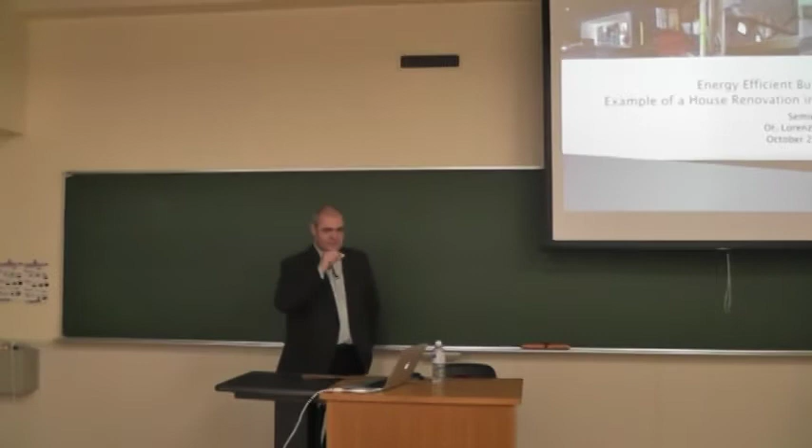Thank you very much, and thank you also Eckhard for the introduction. So, of course, I'm not a specialist, I'm not an architect, but as I mentioned, we had this experience personally in renovating a Japanese house. This will be the second part of the presentation. But I would also like to start with an introduction about energy efficiency and also current research and development trends.

Concerning my vita, in Germany I worked for ABB, a Swiss-Swedish electrics group, and this company also makes house control systems. So already then I had to deal with this topic. At the German National IT Research Center we had a research group working on room or appliance control via internet protocol. That was in 1996, and I introduced it to the industry, and people were quite shocked, because nobody thought at that time about this kind of information technology coming into houses.

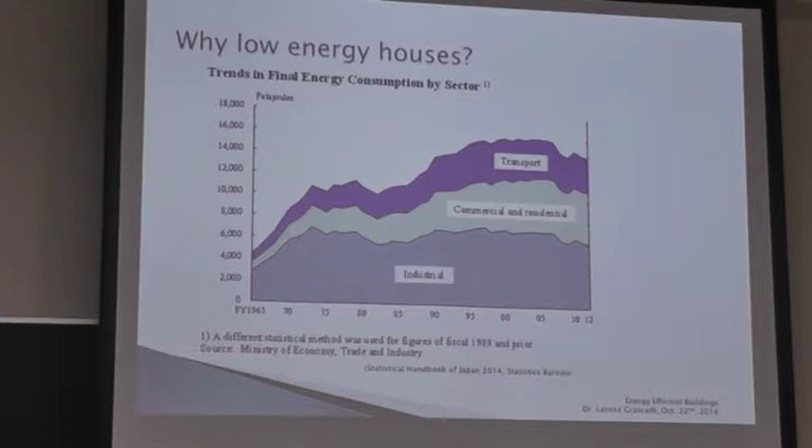So I hope it can be an interesting presentation. First is the introduction: why are we thinking about low energy houses? I have here the trends in final energy consumption by sector in Japan. You can see industry is quite flat, and transportation also more or less flat, but there's a big increase in the commercial and residential sector, which is actually the buildings. From 1990 to 2012, we have an increase in energy consumption in the building sector of almost 42%. So although Japan tries to keep or even lower energy consumption, we have a big increase in the building sector. So why is this?

The reasons are quite simple. You now have a bigger residential floor space. Old Japanese apartments were very small, but now they're becoming bigger and bigger. You have the same in the commercial sector, with big supermarkets and big shopping centers now. So here too the whole floor space increased.

Then you use much more air conditioning. Today, like in Europe, people keep the whole apartment warm or cold, whereas in older times in Japan, only the place where you are sitting or living was heated or cooled. My mother-in-law, for example, when we go there in winter, has this kotatsu, and we sit there with a small fan, and only this small space is heated. But now people have a big apartment and they air condition or heat the whole space, which, by the way, is also done in Europe.

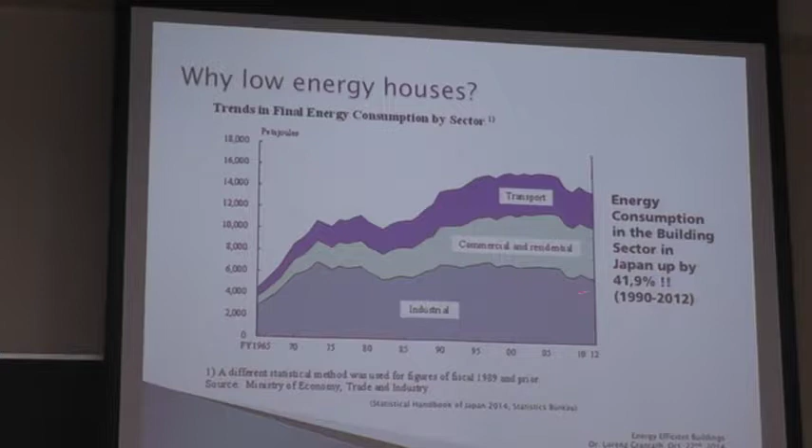So it makes sense to have energy efficient buildings, and it also needs energy efficient building equipment. So of course you need LED lights, you need more efficient heating or cooling air conditioners, for example, and also the whole topic of smart building.

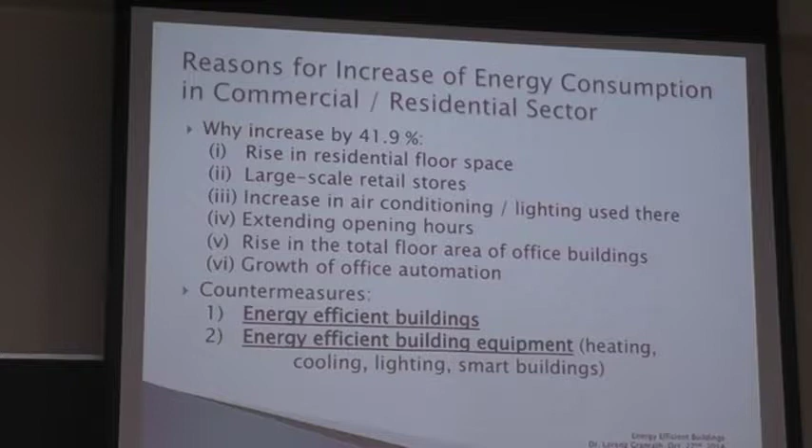I do not want to go into detail about those kinds of things, so my topic today will more focus on energy efficient buildings, and this I want to show in the next slide. So what is actually an energy efficient house?

So basically, if this is, for example, your house, you have passive heat gain, which comes maybe from sunshine, which also comes from the heat outside, which goes through the wall, or sunshine goes through windows, for example.

Then you have internal heat sources that can be a radiator or something, but also the people themselves, they emit some heat. And you have electric light and maybe kitchen and so on. So all these components emit some heat.

And then you have maybe even some storage, but this is maybe more in the way of energy efficient houses, but the walls can also store some energy. And then you have heat loss. On the heat loss side, one thing is ventilation.

If you open the window or if you have a ventilation system, you need fresh air, so you have to ventilate. And again, here you have the transmissions through the walls actually. So if we think of an energy efficient house, we have to think about the transmission.

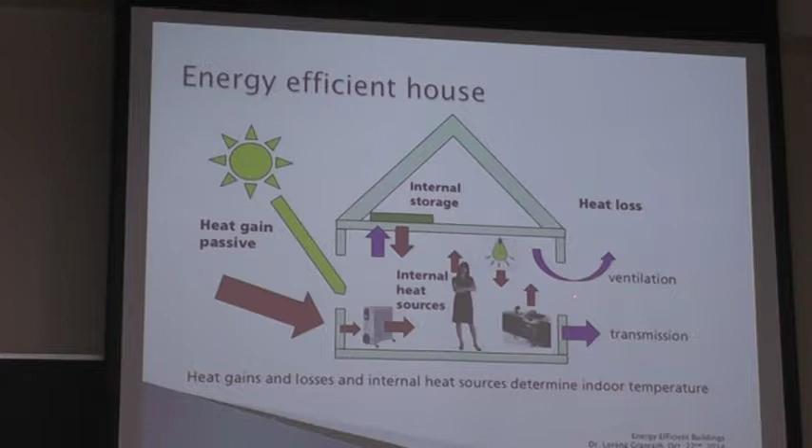So in winter it's, for example, good to have heat coming through the sunlight, but in summer it's not good because it needs air conditioning. So you have to think about the transmission into the house and also the loss through the walls, through the windows, and through ventilation.

So if you think of an energy efficient house, you have low use of energy, what I said before, through efficient devices. So you need very efficient lighting, or you have to use daylight as much as possible to avoid switching on the light.

So then we have to have efficient heating or cooling equipment. And I think here Japan is really extremely well. So to my knowledge, air conditioners from Japan are among the best. So I think in all this, and also LED lights and so on.

So I think in this devices side, Japan is doing very well. Also home energy management systems, etc.

But then of course you have to reduce the heat and cold loss through better and also through outside insulation of walls, then better insulated windows and also window frames.

So in Germany, for example, now triple glass is standard for new houses, whereas when we renovated in 2009, the Japanese construction company suggested single glass windows in aluminium frames. So this is of course not very efficient.

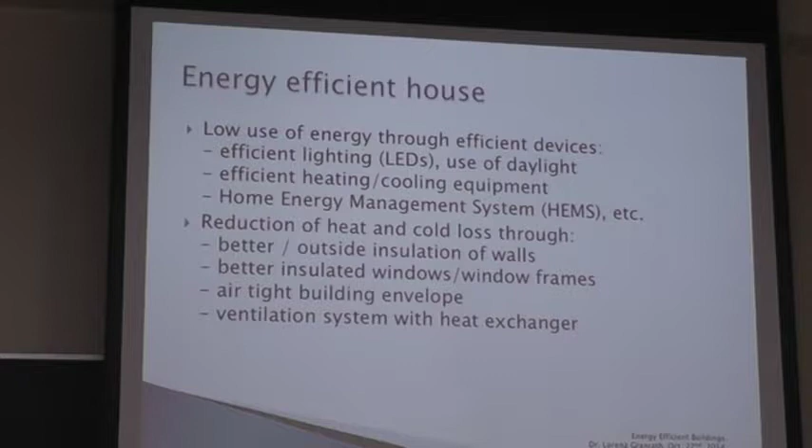for energy efficient houses. So if we look to Germany, the industry developed quite a lot of low energy houses, and the current status, this is from 2010.

This was built in Stuttgart as a model house. This is a plus energy house, so this house produces energy by having, of course, photovoltaics around, but also very efficient insulation.

And if you have a plus energy house, you can have an electric car and use part of the energy that your house produces for your mobility. So I think this will be the future, that we have houses that produce energy instead of costing energy.

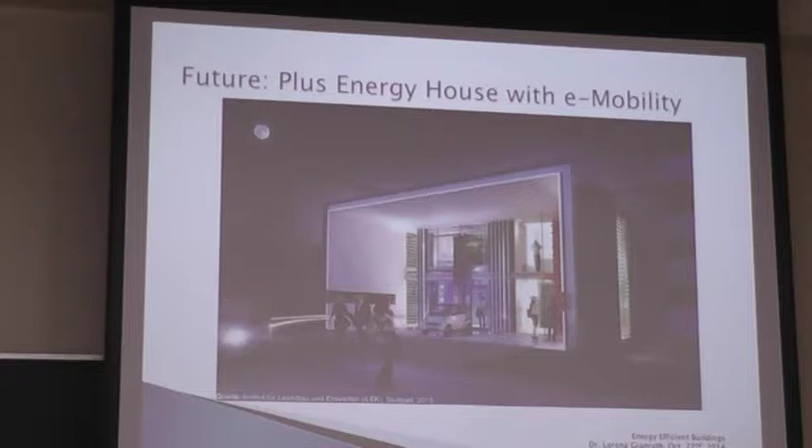So this is a little bit, how can I say, the future vision actually. But of course, from this house to practical houses that you can buy, it's a long way, but you can already buy zero energy houses in Germany.

So the R&D trends, and here I would like to shortly introduce what I was doing before. Fraunhofer in Germany has 66 research institutes and altogether 23,000 people, and the budget is one third coming from ministry, from public research project funding, and one third is from industry, so it's direct contract research for companies.

One of the 66 institutes is Fraunhofer Institute for Building Physics, located in Stuttgart in southwest Germany, and near Munich they have a big area with all kinds of test houses, small buildings where they can test new wall systems and insulation systems and all these kinds of things. This is quite a big area with many small huts being just for tests, and the bigger buildings are actually the laboratory building.

And they have another one in north of Germany, so they look into many topics, also acoustics, but energy efficiency and building systems is the biggest topic. Also into lighting and also indoor environment and so on.

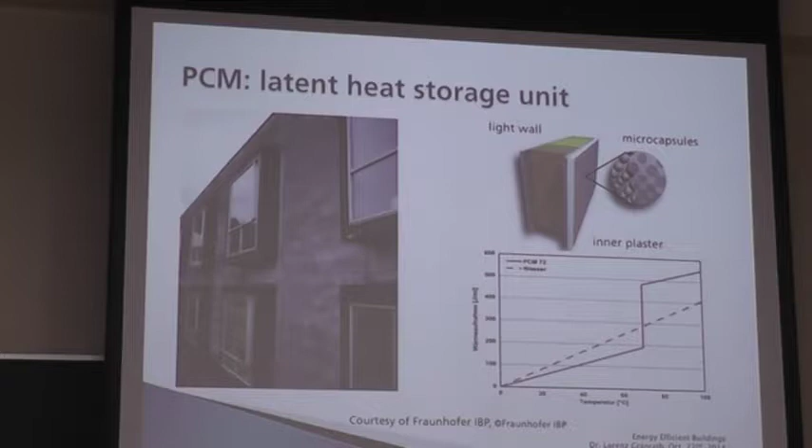So that's beeswax? It's like beeswax? Yeah, it's of course more sophisticated, but it's a little bit the same kind of effect. So you have a change from solid to liquid, or almost liquid, and this can save much more energy. Than heating and cooling, but not generating. No. That's just storing.

Okay, so another topic coming in the future is vacuum insulation panels. If you have vacuum, for example, in windows, it's already used - if you have a vacuum inside, then insulation is the best. The problem is, of course, building something with a vacuum needs mostly very solid structures. So people now start - and I also had some discussion with a Japanese company that makes refrigerators - they were thinking of using vacuum insulation panels from refrigerators for buildings, and I think it's still a matter of costs, but this might also be very interesting for the future.

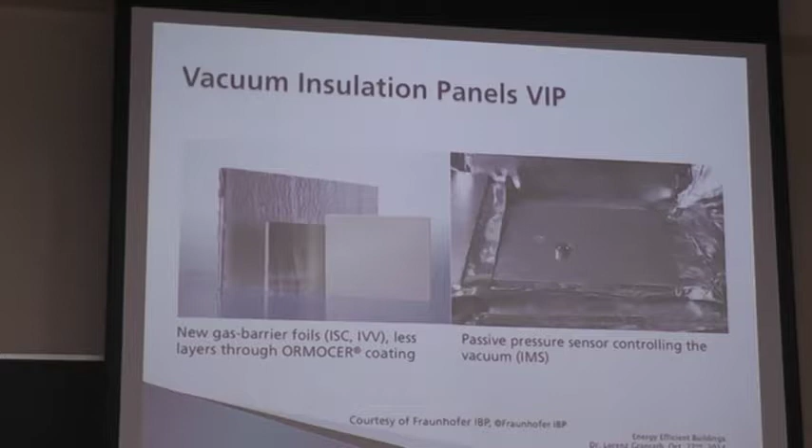So the Fraunhofer Institute is, for example, developing a kind of pressure sensor that tests if the vacuum is still existing inside this kind of building, and it can be some passive pressure sensor. Passive means it doesn't need electricity. You have some device you hold to the wall, and you can read if the vacuum is still working or not.

So these are things the research is working on. This is some aerogel - this is basically like a foam where you manage to make this outer surface solid. So you have some bubbles inside, and this is very lightweight and has a very good insulation behavior. This is used, for example, for light bands, which is lighting in factory buildings.

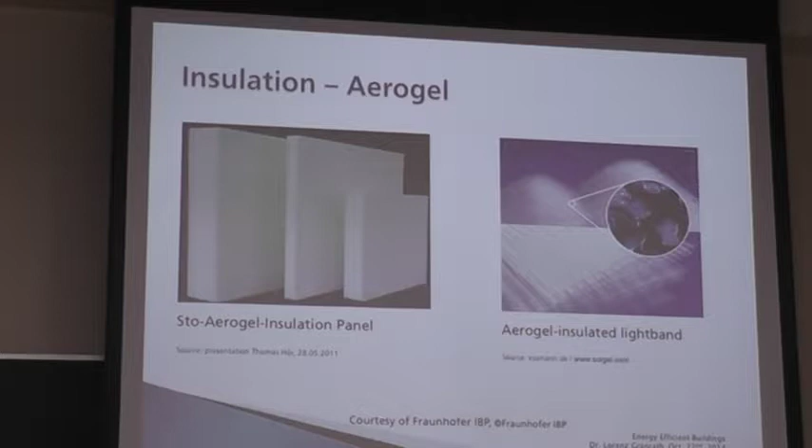A new trend in Germany is also renewable material, so some kind of glass wool with binders made from renewable raw materials, or this kind of insulation brick which is made from clay and some polystyrene and some concrete inside - a prefabricated brick.

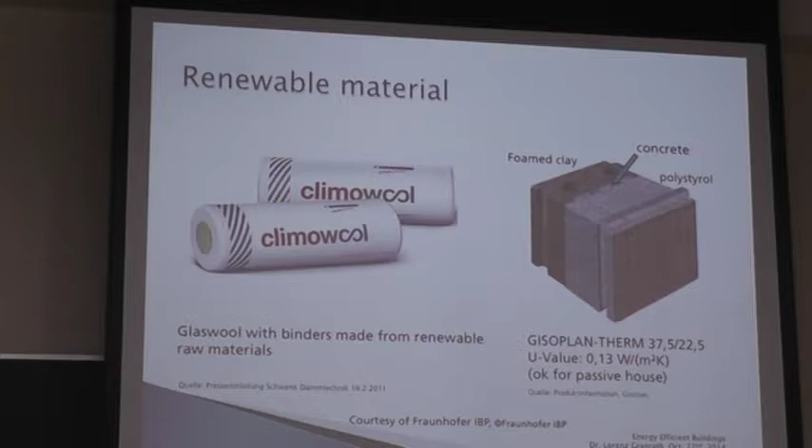And one thing maybe we have to consider, and I would like to mention, is if you insulate a house, the higher you insulate or the better energy performance you have, the more risk of moisture you get. So this is because you have a lot of humidity through usage, so of course you have humidity through rain coming into the house, humid air coming into the house, but also through usage.

Every person generates, I think, 3 liters of humidity per day by taking a shower, by cooking coffee or tea in Japan. So you have a lot of humidity and you have to transport this out, and for this, in high efficiency buildings, you also need some automated ventilation system.

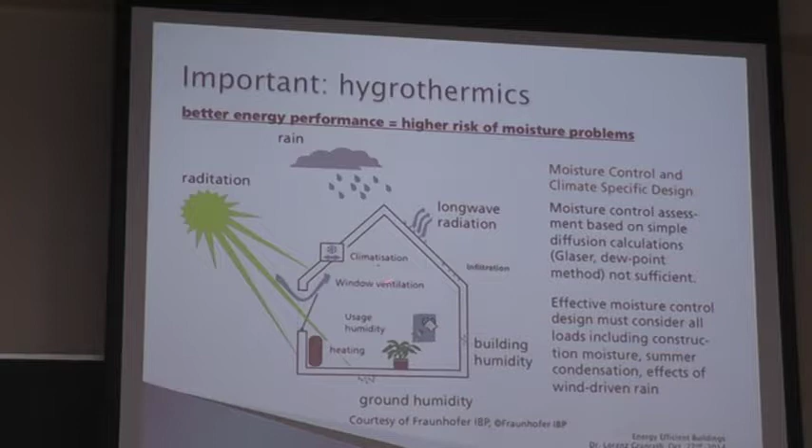To simulate the behavior of walls towards humidity and heat, the Fraunhofer Institute has developed a software system where you input your wall. This is a typical German wall: you have plaster inside, 17 or 18 centimeters of brick, then 6 centimeters of insulation made of mineral fiber, and again 10 centimeters of brick outside. Here you see the software simulates the temperature.

There are databases for every location, and they can simulate the whole year. You see here the temperature is maybe only between 10 and 20 degrees, and you can see how much this influences the inside temperature.

But more important is actually the humidity. Sometimes you have a very high water content if it's raining, and the important thing is that behind your wall, it should not be too humid.

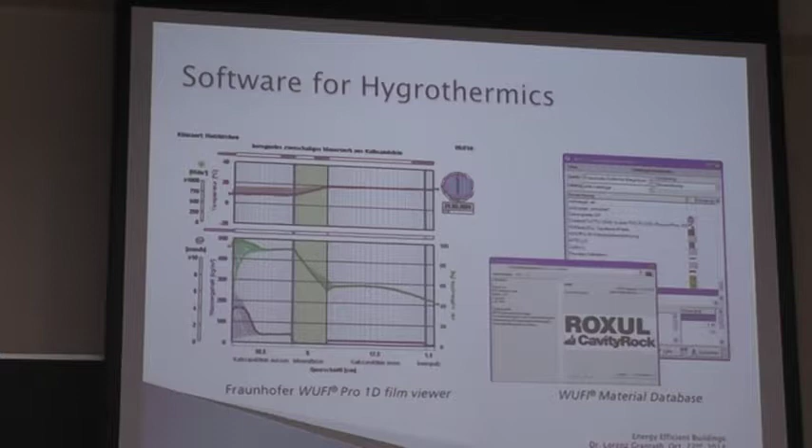So usually at 80% humidity you have fungus and such kind of things. To avoid this humidity, what's very important is a kind of vapor barrier. I explain this because we also see this later in the reforming of our house.

An adaptive vapor barrier is a kind of plastic foil where the pores are variable. In summer, for example, the pores are very big, so if there is condensed water because of big heat outside, you have condensed water inside the wall or inside the roof insulation, then it can go through these pores to the inside of the room. Whereas in winter it's usually more humid inside your building, and then the pores get much smaller and prevent that humidity from going into the wall.

The important thing here is really that you have to secure that the wall gets dry. If there is water, you have to prevent water getting in, and if water is inside, you have to see that it gets out.

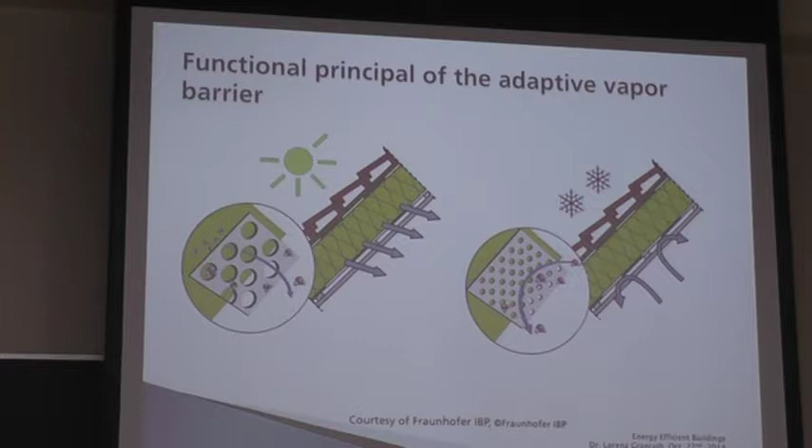Now I'm working, as we introduced already, for AIST, the Japanese National Institute for Advanced Industrial Science and Technology. At AIST we have many different locations, altogether 50 institutes with roughly 8,000 people working.

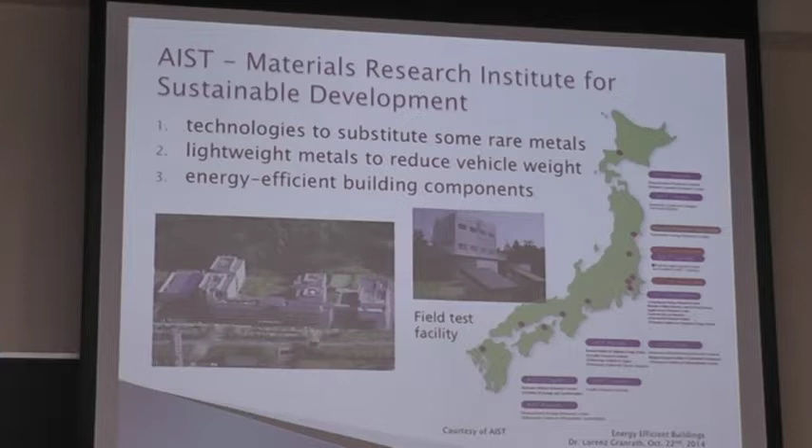This is the Nagoya Research Institute of AIST, and they have a special field test facility for construction materials. So construction material is a big topic here too. One development is called humidity control material, a kind of clay material that has very high water absorption, and this can be used in water retentive bricks, for example, that can absorb humidity when it's getting hot and cool down the environment, but it's also used for the walls.

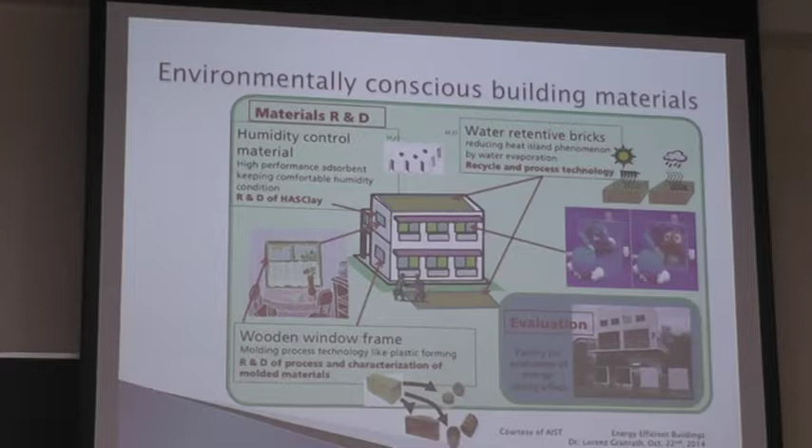Then there's some wood forming technology, so you have wooden window frames, and also a kind of window which is switchable. If you switch it to some kind of mirror state, then it keeps out the sunlight, which you can see here. This is transparent, so you can see through, and here it's like a mirror, so you see a person like in a mirror.

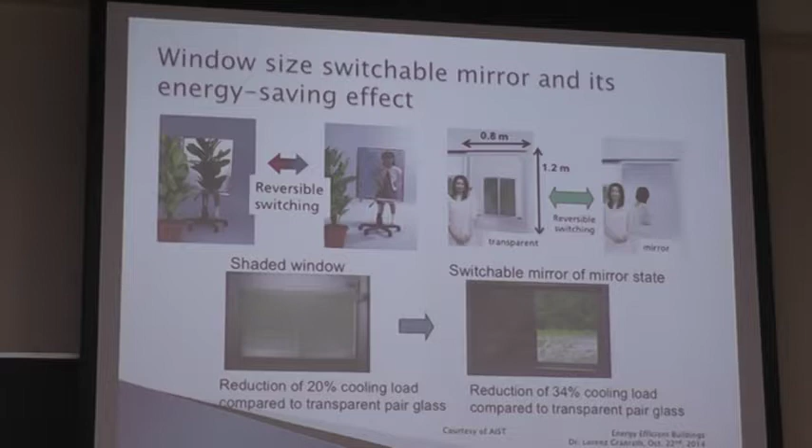This can actually reduce 30% of cooling compared to transparent glass. This is the facility, which I also visited some time ago. These windows are tested here with sensor systems inside, and also these water retentive tiles for roofs and for buildings are tested outside.

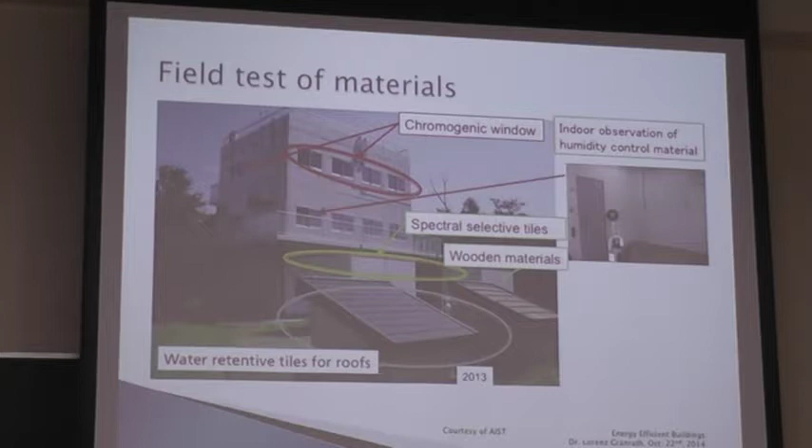So I think now we come to the maybe interesting part: renovation of our private house.

In 2009, actually much before, we were looking for some place to buy in Tokyo, because the rent is very high, so we thought it's better to buy and live in our own place, but of course that's very expensive. So what we found is some leased property which belongs to a temple, and we leased this for 20 years. We looked at many such things, but usually the house, after being 20 or more than 20 years old, is almost very rotten.

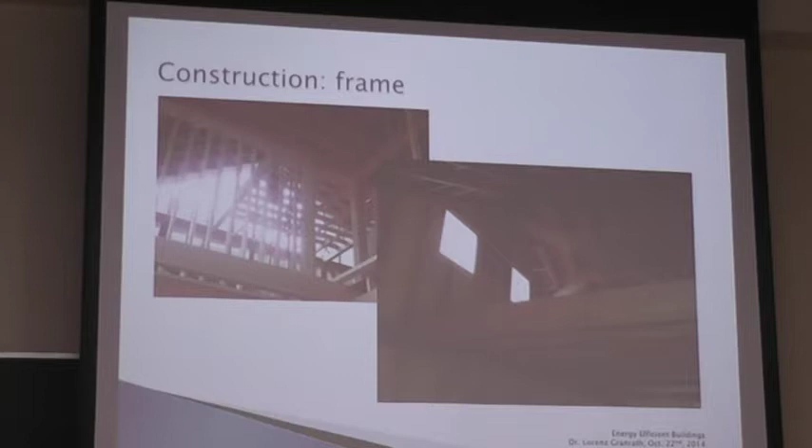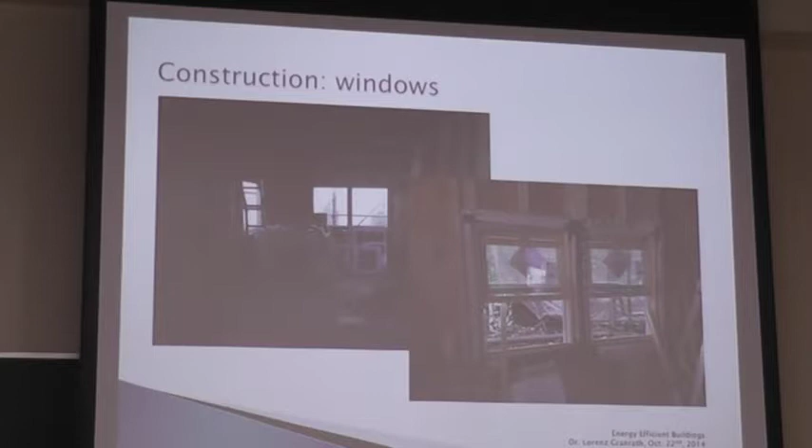So here is the new outside wood panels, and these are some pictures from the inside now. We have used Canadian windows. I told that our construction company actually suggested...

that's maybe better. Oh, fantastic. So the construction company suggested Japanese windows, and we found a construction company that was open to just exchange positions in their offer by things that we bought ourselves.

So my wife got these Canadian windows. It's double glass windows with some kind of heat reflection shielding. It's not the standard of high efficiency German windows, but they are, I think, very okay and very good, and they were cheaper than the Japanese windows.

And you see here we have a lot of them, and here's a picture of how they are built into the house. And I talked about this membrane which prevents humidity going into the wall. And here you see already when the window was built, we have this membrane sheet already surrounding the window, which was not easy to do.

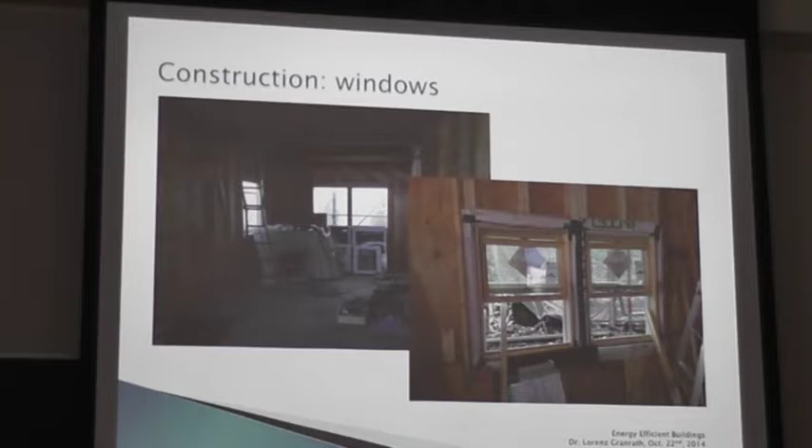So we had some consulting from a German architect who has done this before. Then insulation, so we have used this, I think it's a French company, Saint-Gobain insulation material.

Also concerning this, I can tell a story that the construction company actually wanted to use ready packed insulation material. But first of all, for a 10 centimeter wall, they suggested 5 centimeter insulation, because they said Tokyo is not so cold in the winter. But I said it's very hot in summer, and insulation also prevents the heat coming in, as well as maybe the cold temperature coming in the winter.

So the second issue was there is a very weird Japanese standard that this insulation material, which is basically mineral fibers, which are not good if you inhale them, so there was a regulation that they are sealed in plastic. And if you use this and you get condensed water inside, then all the insulation is gone, and this is actually a catastrophe.

So we also had good advice from a German architect who said, don't use this. The construction company wanted to use it, but we insisted, no, we use these big sheets, and they have to cut and process them by themselves. So you also see here the blocks. In the ceiling we have actually 20 centimeters, and in the walls we have 10 centimeters.

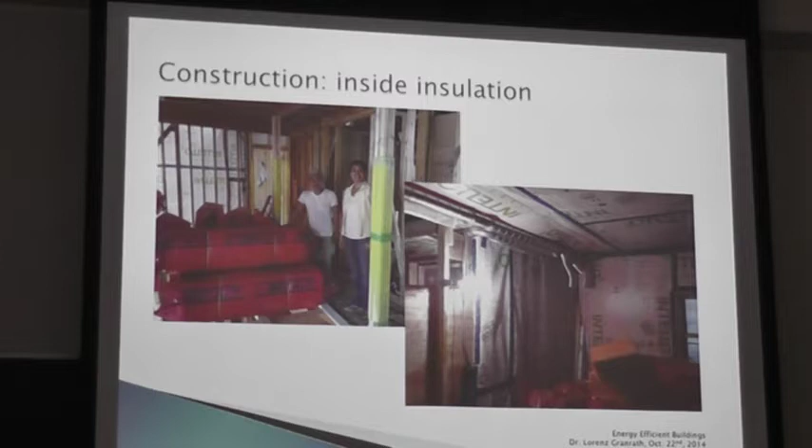The next part is outside insulation, and I have a one hour presentation about outside insulation. I don't want to go into too much detail, but the problem is usually you have your wall with 10 centimeters, and we put another 3 centimeters outside.

It's this polystyrene we put around the whole house, and this actually shifts the point where the cold air inside the house in summer and the hot air outside meet. So you have more space where this temperature difference can level out, just to put it in a simple word. So this is actually proven to be a very important thing.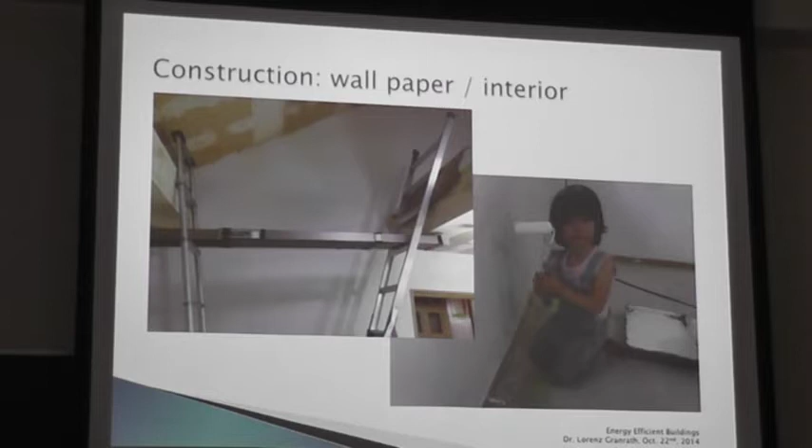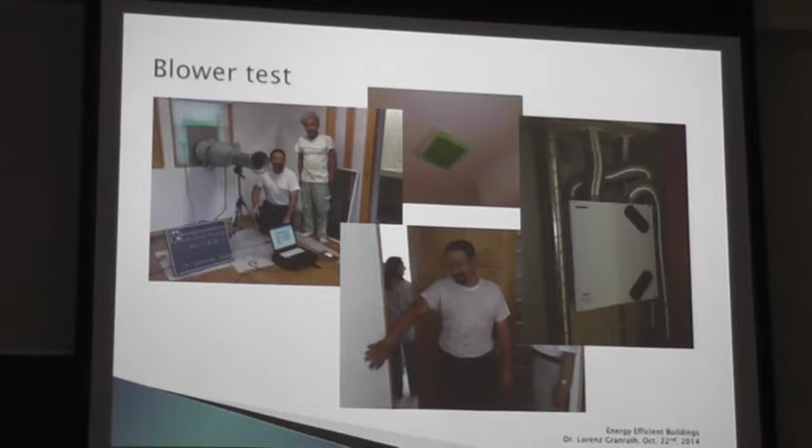You also mentioned you had some blower tests. What we did is a blower test where you seal all openings in your house, and this machine creates some under-pressure of actually 50 Pascal, and then you check with sensor systems if this under-pressure is held by the house or not - basically if the house is open somewhere and air comes in, or if it keeps this 50 Pascal under-pressure. According to German regulation, this is a kind of coefficient. We have a coefficient of 2, which means that with 50 Pascal under-pressure, the whole air volume of the house would exchange twice per hour.

It sounds like quite a lot, but it's actually the criterion for a low energy house in Germany - it has to be 3 or better. If you have these highly insulated passive houses, which are really highly insulated, then the value is 0.5, so even much better. But for a renovated house, I think with a value of 2 we are very good.

Maybe one word concerning this test: normally you do this blower test when you have the construction at a certain state, to check if maybe this is nicely glued or if somewhere some air comes through. The problem in Japan is the way of building the house is different. In Germany you have first the basic construction of the house, and then the next people come and put the wallpaper, then people come and do all the electrical installation and so on - step after step. But here in Japan, on the top floor people were already putting wallpaper, while on the first floor the floor was still open and they were doing water pipe installation. So we could not check in this state if the house is airtight, or if there were some problems with processing this kind of membrane system.

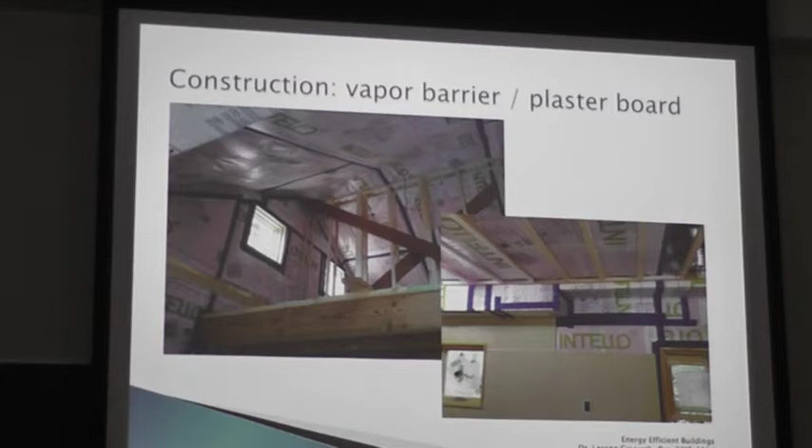We found out too late that we had to do a blower test, but it was not possible because they already wanted to proceed with the wallpaper, without having to change the whole construction and causing additional costs.

So what we did is basically, when the house was ready, wallpaper was on, everything was done, then we did the blower test. So we only have the final result, but we could not fix any possible problems. This is actually the owner of the construction company.

What happened is air came blowing out of the light switch. And the problem concerning our house was that one day when I came, the unit bath was built in, but there was no insulation between the unit bath and the outside wall. So we were quite shocked, and they told us it's always done like that in Japan.

So I explained to him, we talked about a closed building envelope which is airtight, and then there can't be a 4 square meter hole inside because of this unit bath. This was the typical problem we had, so I told him, you stand here and put your hand here, and I take a picture.

Then he said okay, he admits it was the unit bath. And he was quite shocked because he said he understands actually what the whole construction is, what airtightness means, and why we had not everything perfect, basically.

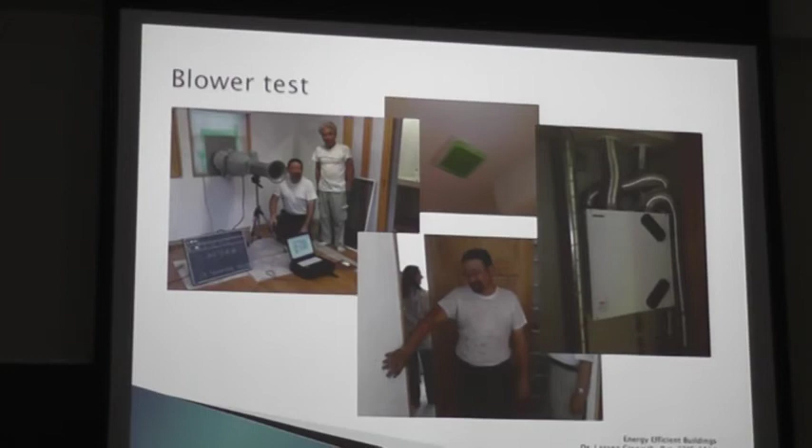And you have water running down the window because this condensed water is collecting because it's too humid inside, since you do not exchange the air. This is mainly because of breathing, bathing, cooking, and sweating. Every person emits some humidity, so you have to transport this out of the house by ventilation.

And if you do not want to do this regularly, or usually nobody does it regularly, it's good to have a ventilation system.

This machine actually has a heat exchanger inside, so the used air is going through here and the fresh air is coming in here, and it's a cross heat exchanger, so the energy is exchanged.

So in summer, the fresh air is cooled down in this machine by means of the used air, which is air conditioned, and in winter it's the same vice versa. This actually saves a lot of energy, and finally you also have 24 hour ventilation, you always have fresh air. So yeah, this was the last picture.